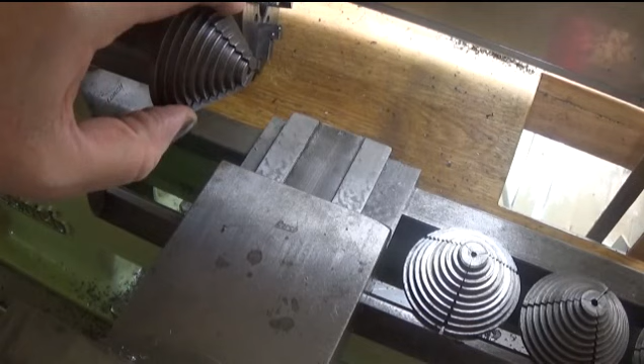So when they were new, they were an excellent precision tool for holding ring work. If you wanted to machine the outside of a washer, a ring, or a collar, just put that on and do him up tight. A fantastic thing for that sort of work.

They've had a pretty rough life, so I'm guessing that they could be dressed up quite a lot, and probably if push come to shove they could be all machined down one size. That'll be a future project and I'm still thinking about that. They're sort of usable as they are.

Have a look, that one's got a bit of wobble on it, but it's a double up. We have 5 of these in the set. There's a 1, 2, 3 and 4, and these are reasonably good. They're in 0.2 of a millimetre sizes.

This is an extra number 3 that come with it. I was thinking I was buying a complete set with 5 in it, but they're a bit hard to read, and this one is a number 3 as well, which is the same as this number 3 that's had the outside machined off. So they are a bit rough.

I'm thinking probably we could clamp a ring on the outside and machine them all up nice and true, at least face them all off. That's something that's probably worth messing around and doing.

But they're fairly rare, and to find a Lorch set, especially in 12.5mm spindle size, is pretty impossible. So there's quite a list of things that I've been looking for with F Lorch written on them.

Center sets, some dead centers and a live center are on the list, and this was a set of things too. There's also an internal set that I'd like, but they don't turn up very often, and I was glad to get these, and I reckon they can be dressed up okay. So any comments or thoughts or insight on how to do that would be gratefully accepted.

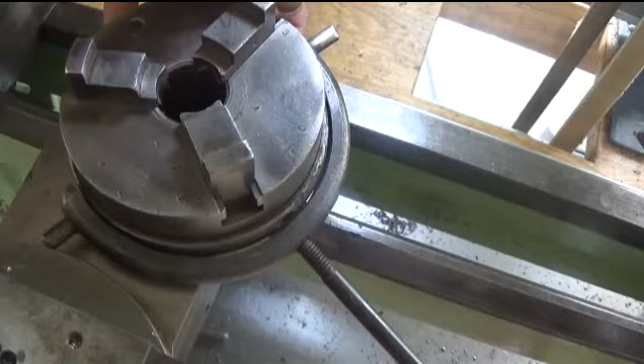Another thing that I picked up on eBay very cheaply was this little bezel scroll chuck. I was thinking that this was like the Deckel one from Germany and a couple of others that I've seen, and the smaller version that I have already, in that the jaws would be replaced or reversible, but these aren't.

I've only got an external set of jaws, and it's had this arm put on it at some point for use on a grinding machine or something. So there's a quick release mechanism. But apart from that, it sort of seems pretty true and pretty neat, and it would clean up okay.

So that was the right price. I think I paid like 40 bucks for it.

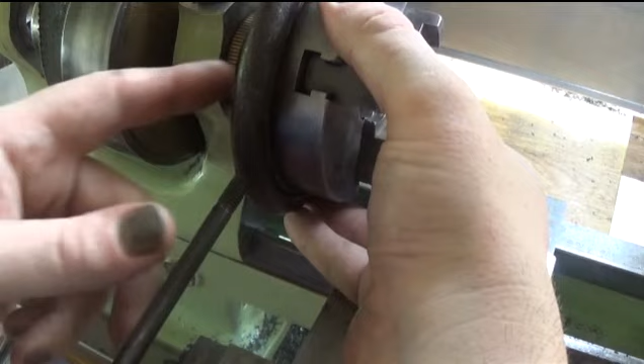Ideally, if it had a set of internal or inside jaws, this little chuck would be really nice for this, and I would still like something similar for this machine.

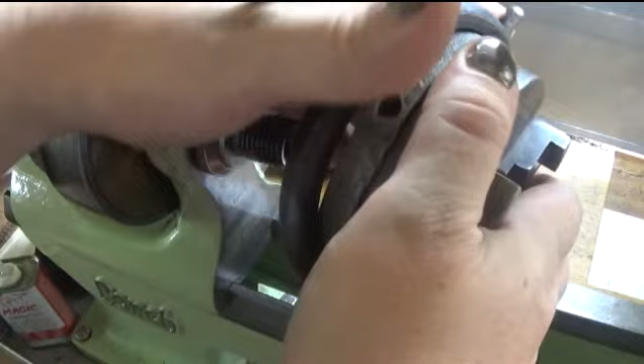These bezel scroll chucks are nice and easy to get tight, and easy to use and quick, and they're usually mostly nicely well made. This one is Good Old Pratt, which was a hardware brand in America, hardly synonymous with top quality machinery, but it seems to be a nice little chuck, and we'll put that in the box and have a think about that.

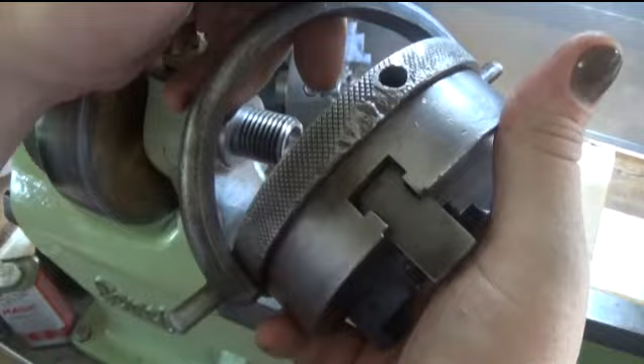I doubt any jaws will turn up, but if they do, I'd certainly put this on the lathe. Otherwise I might just give it a clean up and see if I can flip it or swap it or something. So that's another thing that I've found recently.

The other thing I've picked up is a couple of nice books, and I buy these if they're cheap or if they're given to me, and this one was by a local picker guy. Really pleased to have it. It's been in the rain at a yard sale and a bit unhappy about that, but not much you can do. I've got the book.

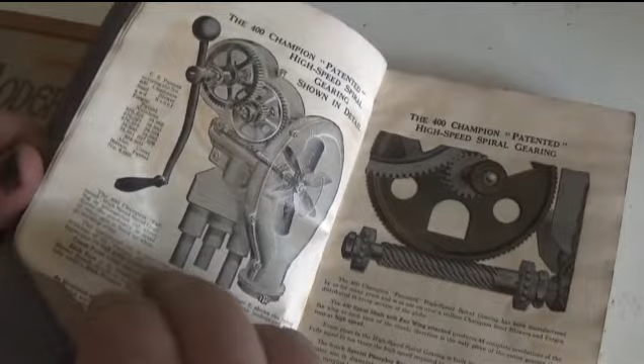If we have a look at the cover, which is a bit faded, the Champion Blower and Forge Company, number 44, catalogue 1922, and it shows mostly blacksmith forges that we're probably all reasonably familiar with.

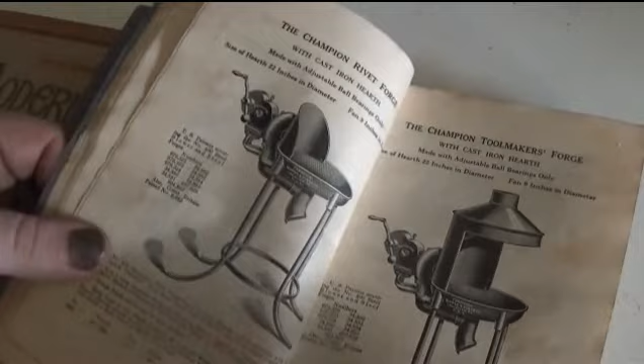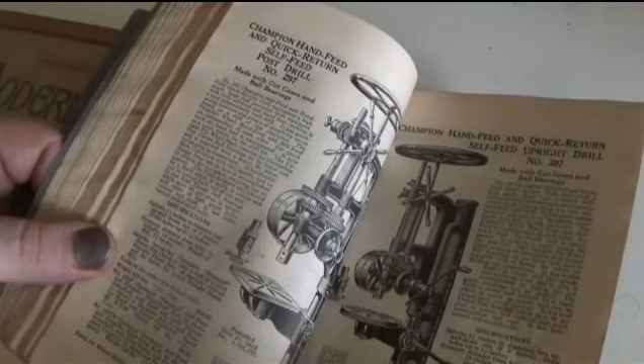A huge range of them, but as we go on, things that Champion made, the drill presses, big and small and tiny and huge. It's a pretty little machine.

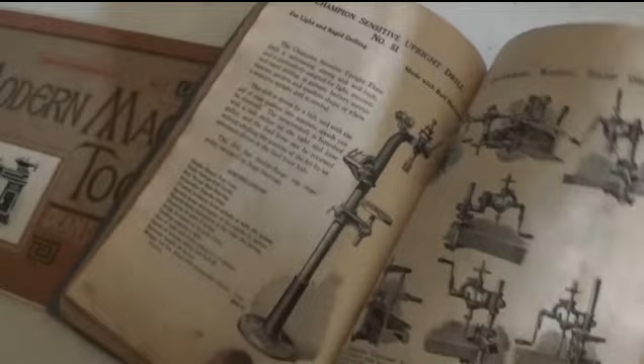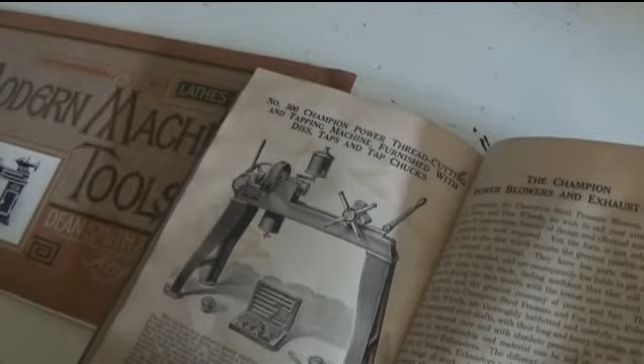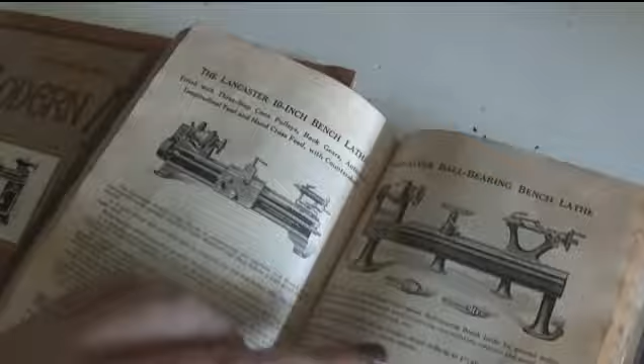Through to arbor presses and workshop machinery, power hacksaws, tyre benders and axle shrinkers, taps and dies, a threading machine there, and of course lathes, the 16-inch lathe or a 13. There is quite a range of machines, a 10 and a smaller one. Bench grinders. That's a nice book to have, nice catalogue.

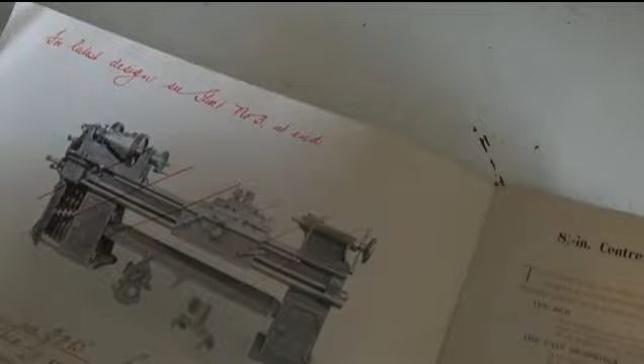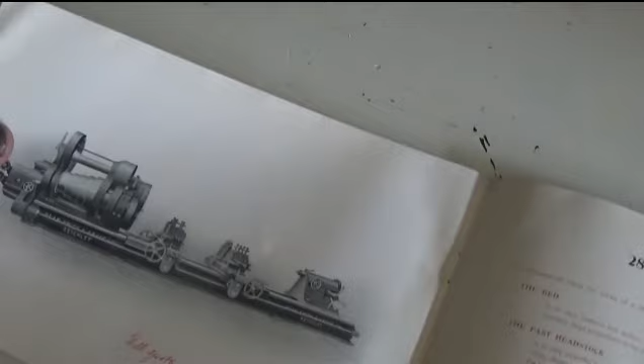And an 8.5-inch lathe, and bigger ones, right up to this one's 28-inch centre lathe, which is 56 inches swing. Some big machines. We'll quote especially, it says, and no actual price, but I bet getting it to Australia would have been expensive.

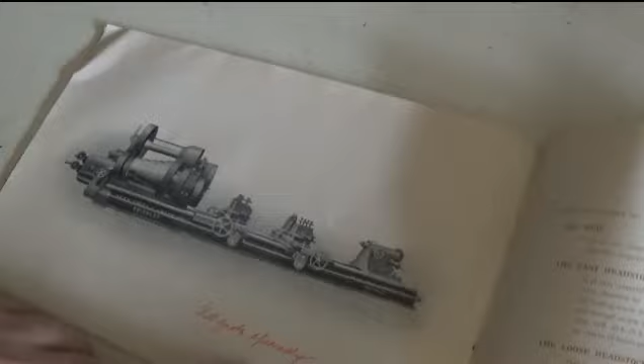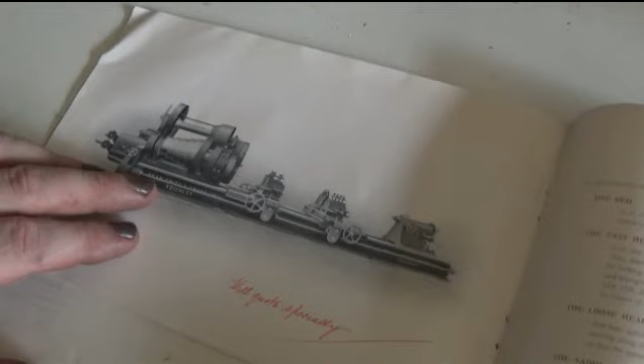And I've seen these cut up, big machines like this. I remember going to a yard sale with my dad, and there'd been a big lathe like this there, and they cut it in 3 bits to load it on the truck with scrap. That was the sort of price it went for. So that's a bit sad. But lots of nice machines in there. Nice book to have.

And also nice fold out leaflets. When I first bought this I thought it was a reprint, because it is in really good condition, but it's not. It's all handwritten here. The beautiful airbrush work, ink work on photographs.